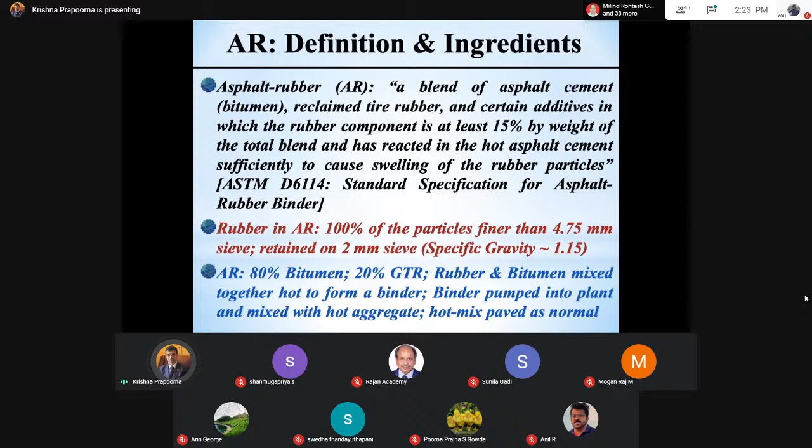Now, if you talk about open graded asphalt rubber - so gap graded is 6 to 8%, open graded, which is much more porous in nature, the binder content will vary anywhere between 8.5 and 10%. You see, much richer - it has more space to accommodate more amount of rubber. So go ahead, use it. We have been very successful in blending both in India, also in our own laboratory facilities, and we have also tested on actual field sections, which I'm going to share with you. So this is the prologue of what we will discuss today, and you can see the AR technology has been very well used.

One very good strategy as a pavement system - it's a systemic strategy, and this has been acknowledged by several experts across the world. You have a very strong base course with PCC, Portland Cement Concrete, and then a very thin asphalt rubber friction course, ARFC. That's a blend, a combination, a composite structure that has been successful across the world.

One problem here is slightly political - you have this Portland Cement Concrete at the bottom. Now the cement industry comes and says, okay, we placed all the structural layers all over the place, we put concrete, and you're putting one small thin layer of asphalt. Now I cannot see this, obviously, right? So the concrete industry says, we are not able to see the concrete that we placed. But you should go beyond that - the systemic approach is, this is only half to 1 inch, which means only 25 millimeters, could even be less than that. 12.5 to 25 millimeter section on top of the PCC, which could be even 600, 500 millimeters thick. So it's a strong structural layer at the bottom and a thin functional layer on top.

What is the advantage of this? You see, after 3, 4, or 5 years, let's say it has started to ravel, which is unlikely. With asphalt rubber sections, I have seen with my own eyes a few sections that are about 25 years old without even a single fine crack.

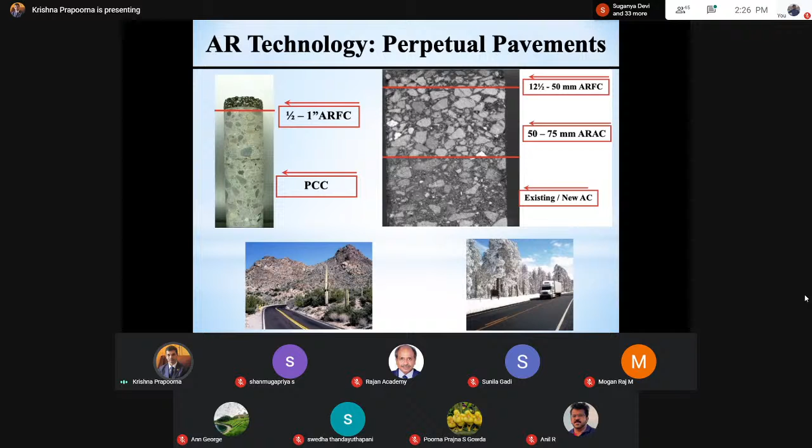There are a few sections in cold countries where I have seen - because I worked in Europe, we placed asphalt rubber there also - and we saw some cracks. There's no doubt there are cracks during the winter season, especially low temperature thermal cracking, but then it started to self-heal. That self-healing capacity comes from the rubber's resilient property, because rubber is resilient in nature. It's elastic, right? It can come back to its original shape.

So the benefits - humongous amount of benefits, multitude benefits here. Reflection cracking, or reflective cracking as we call it: we have concrete at the bottom, there are cracks near the joints, obviously joints are vulnerable to cracks, you have an asphalt overlay, it simply goes up. Now if you put asphalt rubber as a stress absorbing membrane interlayer, it can arrest cracks. Less maintenance, more durable, obviously.

Raveling - no raveling whatsoever, because it is so rich in binder that there is no dry aggregate whatsoever. It's rich, 7 to 9% binder content.

Good rut resistance. Question, right? Some of you might think, it has high amount of binder, it can start to bleed. But we are placing this as a very thin section, maybe 25 to 50 millimeters. You can expect very little rutting on these sections, mainly because you have larger sized aggregates which can take up the load and help arrest rutting also.

No problem with cracking, as I told you, self-healing. Skid resistance, because it is open texture or gap texture. Definitely smooth ride, very good ride comfort. And I showed you a picture both in cold climates and hot - in fact, I was there in Arizona and Sweden.

In one year, 2010, I experienced 70 Celsius pavement temperature in Arizona, and I moved to Sweden the same year where I saw minus 46 Celsius. So you can see a range of temperatures, and we have seen asphalt rubber working very fine in both conditions. In fact, less splash and spray because of high porosity.

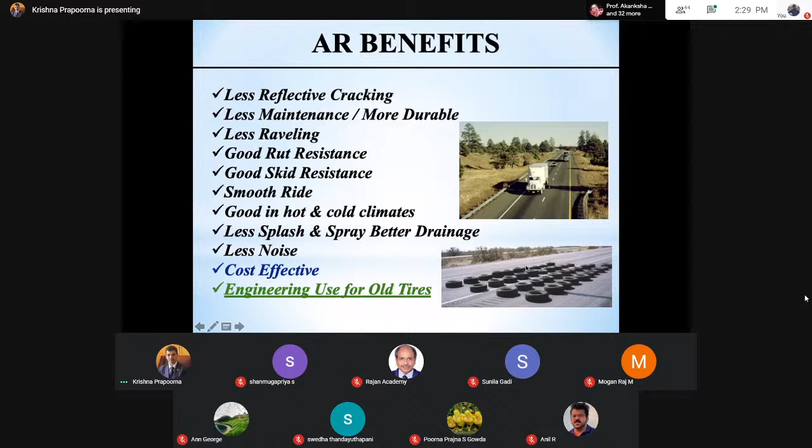If you have a lot of tires that are discarded, don't burn them. Use them in asphalt rubber blending.

If you need to know more about asphalt rubber, how it is blended, how much rubber content, what is the gradation, what is the process, wet versus dry, all of this, you can go to the asphalt rubber standard practice guide. This is free to download at rubberpavements.org. I'm one of the co-authors. In 2012 we released this document, the asphalt rubber standard practice guide. You should be able to get this. If you cannot get it, let me know and I will share it with you.

Now, one project that we did, I'll get into the actual point. We had a Government of India Department of Science and Technology project when I was at IIT Kharagpur for about 3 years, where we developed a mix design procedure and implementation plan for asphalt rubber gap.

Now you see, I'm talking about asphalt rubber only, not CRMB. CRMB is a different blend, with 8 to 12% rubber content. It does not fit into the ASTM definition. So whatever I talk about from now on is asphalt rubber, meaning a minimum of 15% crumb rubber inclusion by weight of the total blend. That's what it's all about.

So asphalt rubber gap we wanted to develop. What is gap here? It's a gap-graded gradation where there are a lot of fines and some portions in the middle are removed from the aggregates. They are all larger sized, obviously.

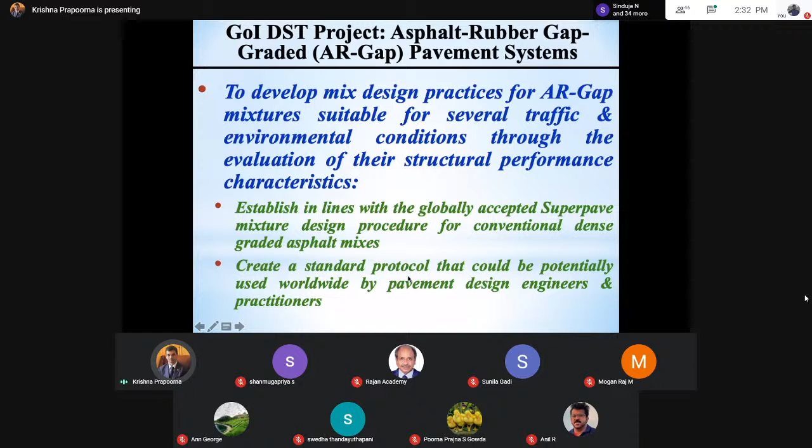So we fully went into the Superpave design, and that gave us a lot of confidence saying, okay, this product will last for this many number of years. We checked this with our lab facilities and lab experiments, and we went to the field and implemented it also. We also wanted to create a standard protocol, which is now pending with the DST.

Now, if you need more about what asphalt rubber blend is, if you don't want to go through the design guide, there are two different papers. One talks about state of the art research, a research review, by one of my past PhD students who worked at IIT Kharagpur, now a professor at IIT Palakkad, Dr. Veena Venudharan. Yesterday I showed you about pervious concrete, that was another student who works at IIT Bhubaneswar, and this person actually works at IIT Palakkad.

And then the other state of the art paper we recently published, in 2020, in the Resources Conservation Recycling Journal, with my other colleagues from the US and Europe. Both are very popular journals. We talk about what is the advancement, where do we use this blend, can we use this blend in dense grading? That question is always there, right?

So we've always been saying, okay, gap, open, asphalt rubber - what about dense graded asphalt rubber? Can we use it somewhere? Yeah, that is what we are doing right now. Our team is now working on coming up with strategies where we can simply blend rubber modification into dense graded mixes, probably with a dry process where we don't have to worry about agitation, with storage issues eliminated and oxidation issues eliminated.

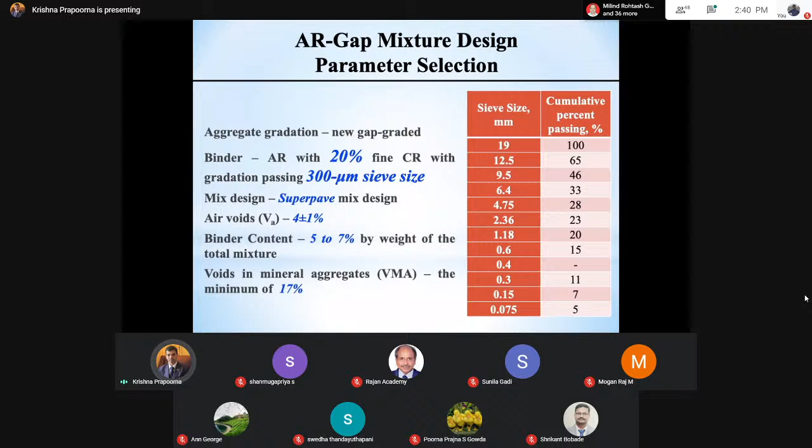Now, a demonstration test section I thought I'd share with you. We came up with this design - this is an actual test section, a cross section of a road on a state highway, now a national highway - a very high traffic road near Calcutta.

We talked to West Bengal Highway Development Corporation, and they were benevolent. They gave us this section where we used a very thin layer - only 40 millimeter asphalt rubber gap, our product, overlaid on DBM, WMM, GSB with different gradations. We did not change any of these; we only did the topmost layer, the AR gap, on top of several existing layers. We applied a tack coat.

So here you can see the demonstration test sections. We had about 250 meters across two sections. One was 5.3% binder content, the other was 6.3%, and the 6.3% lasted for 2.5 years. We told them clearly that 5.3% we'd try for their sake, since that's closely related to the control mixture - you all know 5.3% is what we use for a dense graded control mixture. So we put a control section, a 5.3% asphalt rubber gap section, and a 6.3% section - three sections in total, and you can see all our engineers there.

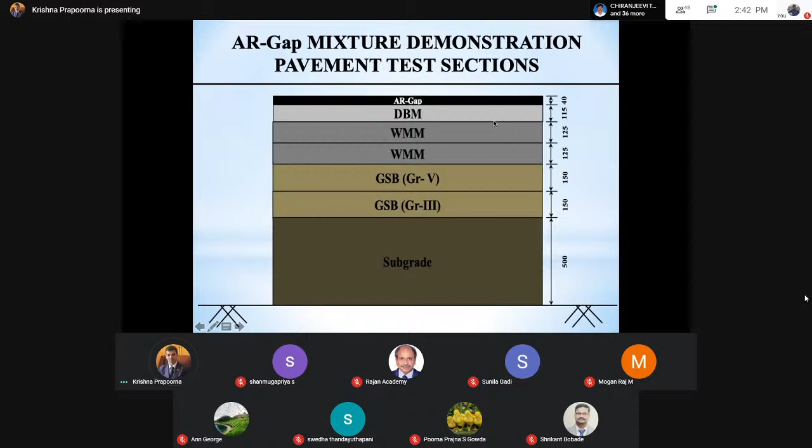One important construction practice for any thin section, as a general thumb rule - if you're from the construction industry advising colleagues, when you have a thin section like 40, 50, or even 30 millimeters, don't use a vibratory roller. Use only a static steel wheel, and if required, a pneumatic tire. Run the required number of passes and finish the compaction. Don't use vibratory roller, because if you do, the aggregates start to get crushed and break into pieces. The voids you designed into the gap graded or open graded mix get filled with these small particles, defeating the purpose of the thin section design.

So we told the engineers - the engineering chief and contractors were all there, and we were monitoring quality control ourselves. We said please don't use the vibratory roller. They were actually furious with me, but I said no, you cannot use it because it's a very thin section - they'd been used to using vibratory roller and pneumatic tire together. I said use only static steel, without vibration. You can see the smoothness achieved at the end. In June 2017, we had one paver doing the job, and we calculated the required number of passes.

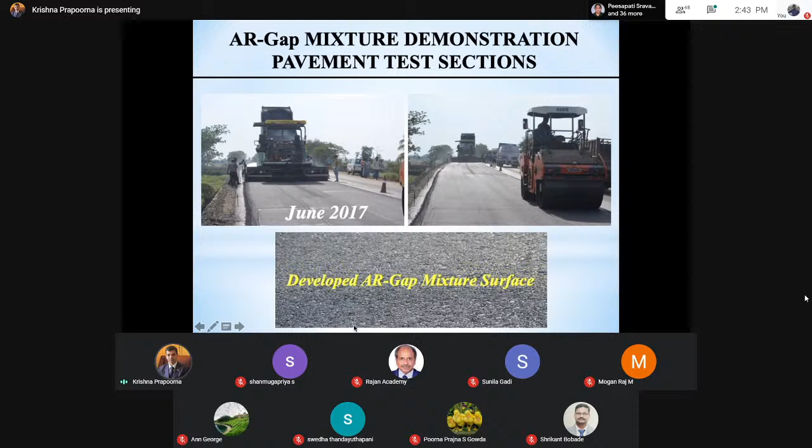Finally, this was the product, the asphalt rubber gap mixture surface, from a very close-up view. June 2017, very smooth, very well done job by the contractor. And this is the trial section. You can see the asphalt, this banner still holds, it's still there. Asphalt rubber gap graded wearing course, 40 millimeter. That was the design that we made.

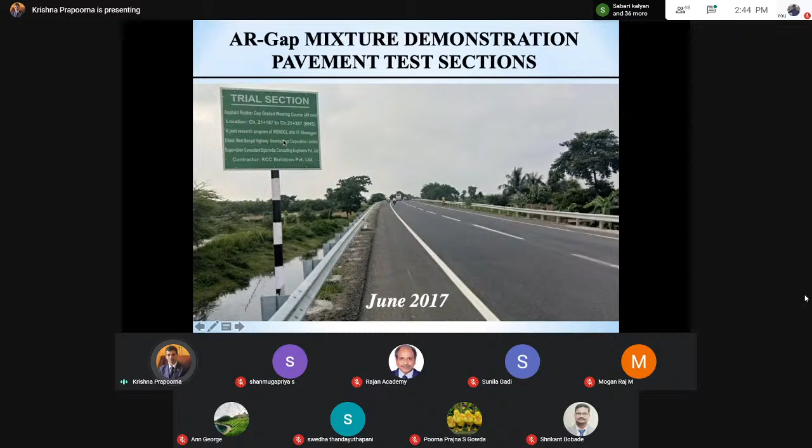This was a joint program with West Bengal Highway Development and IIT Kharagpur. Here is our team. Some of my students are also there. Some of my MTech students and the general crew that was helping us.

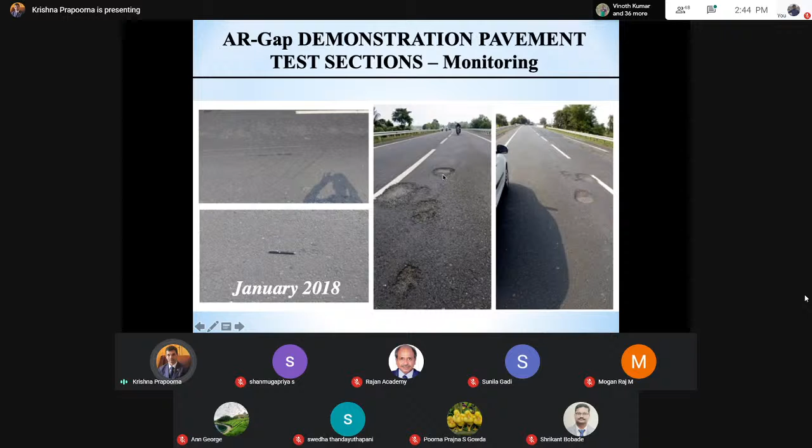We monitored that for about 3 years now. In January 2018, when I had moved to IIT Tirupati already, we took some pictures. I went back there and took some pictures. This section is where we built. This is the control, all potholes, same road, no pothole here. And then the same year, you can see the control sections had fatigue cracks.

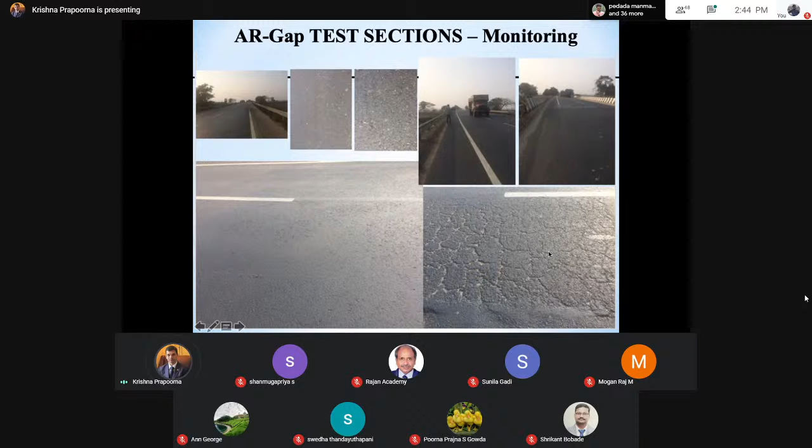Nothing on our sections. In November 2019, very recent, about 1 year ago, these pictures were sent by the West Bengal PWD people. They said yes, your sections actually slightly had fine cracks, so we had to patch it. The reason was simple: the state highway that we designed became a national highway. We didn't design for a national highway traffic.

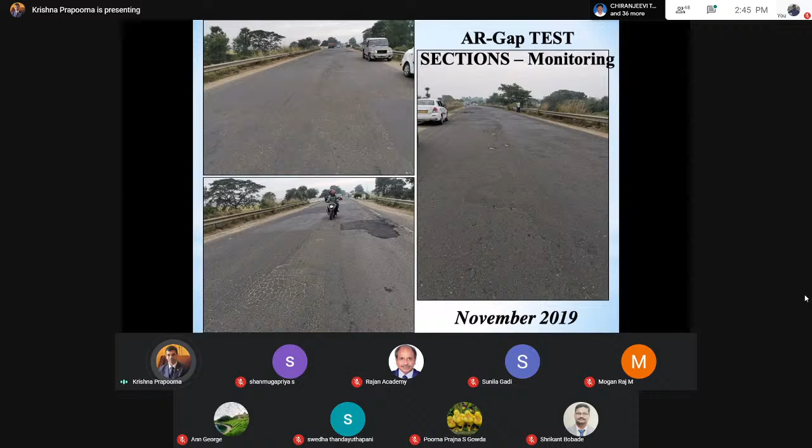So we are now capable of designing it for a national highway. And it will last, I'm telling you, it lasted for 2.5 years without even a single crack. So if you tell us you'll design it for a national highway, we will give you a product that can last for at least 8 years minimum. That's the confidence there. That's about asphalt rubber.

We'll take up some questions if you have.

Now let me go into pavement asset management. The project that we have with Andhra Pradesh Road Development Corporation. We are actually developing a toolkit for them based on artificial intelligence, artificial neural network, and so forth. I'll share with you some 5 or 6 modules that we have already developed, and then how do we go forward with this.

Pavement preservation: you can arrest cracks, you can have raveling removed, all of those things that you can do with asphalt rubber. That's a very good pavement preservation strategy that we have tried. You have cracks, raveling, potholes, all of those that can be arrested with simple minor rehabilitation. If you have major rehabilitation, that means you are going to rip off the entire section, mill it, mill and fill - that's what we do.

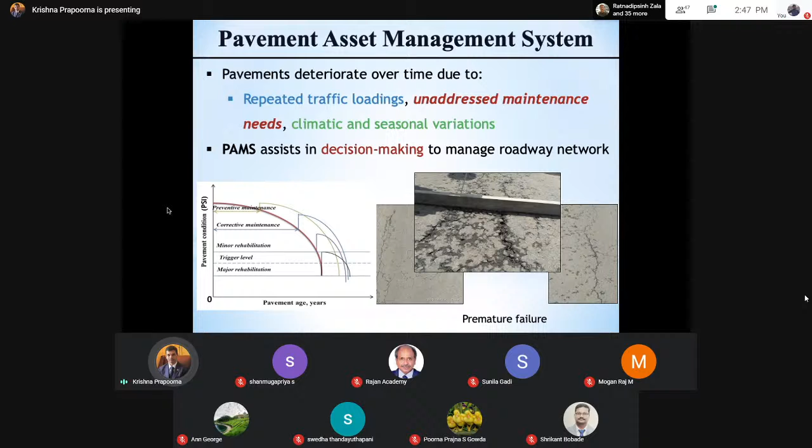If that is there, then you incur a large amount of cost. So that is exactly where this pavement asset management toolkit will help us - what happens at the end of the first year, second year, 10th year, 15th year, and so forth, for both asphalt and rigid sections, concrete. This assists in decision making depending on the budgetary constraints that we have within the road.

So if you look at the history, it all started in the 1950s during the AASHO road test, done between 1958 and 1960 in Ottawa, Illinois, USA, where they had several test sections built, about 800 sections built. They ran the trucks, different trucks, and that's how the ESAL concept - equivalent standard axle load, single axle load or standard axle load - came up. And they came up with different designs of CBR and many other things.

So within the same project, they also came up with this asset management, and they came up with something called the Present Serviceability Index and rating, also the condition rating, ride comfort. All of those were the products or outcomes of the AASHO road test, that is being used universally now. In 1965, that's what is the PSI, Present Serviceability Index. In 1970, they came up with a management system, long-term pavement performance studies - in the US and elsewhere we call it LTPP. It's still running right now in the US.

Washington State DOT came up with the project level, apart from the network level. Good roads, obviously, they came up with the statement: good roads cost less, which means you need to be maintaining it every now and then, so you can reap the benefits of the entire design life. In 1979, they had an NCHRP report on pavement asset management, and that became an international level workshop on pavement management systems, PMS. Then they came up with guidelines in the 1990s, which also got into the AASHTO 1993 guide, in both asphalt and concrete.

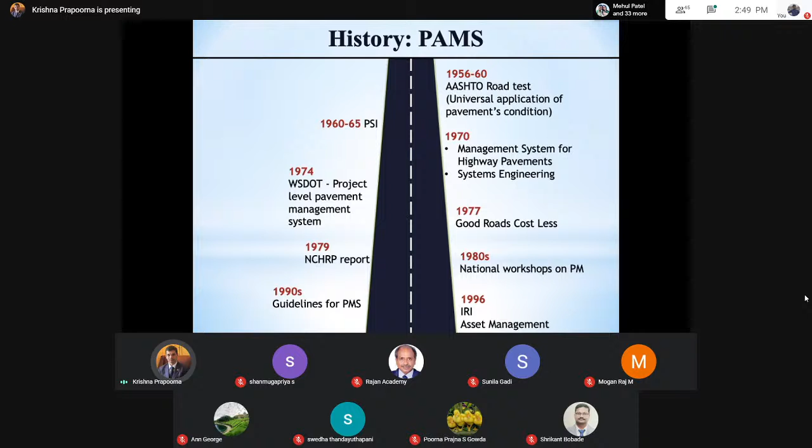Now there are several modules within PAMS, Pavement Asset Management System. Obviously you need to be collecting data. That's the first step, it's a circular process. You continuously collect data on cracking, pavement condition, potholes, etc., and you create a database, we call it the database management system, DBMS.

Then you detect the various distresses using either manual survey or windshield survey, or using computer tools, with a mobile app also possible nowadays. The DBMS and data, they talk to each other using some kind of network, that's the communication. Then we predict the performance of the pavement sections based on some numerical analyses and toolkits, based on the actual data.

Then you come up with the alternative design strategies. That's the recommendation that I showed you: preventive maintenance, routine maintenance, minor rehabilitation, and many other things.

One other advantage of PMS is, because you have the data, you should be able to calculate the costs also. When it starts to deteriorate, cost will start to increase. If you don't do anything for 12 years, finally when the pavement fails, you will have to invest a lot. That's the cost comparison of alternatives. Then you do the prioritization based on the budgetary constraints that we have, and finally implement the strategy that we have come up with.

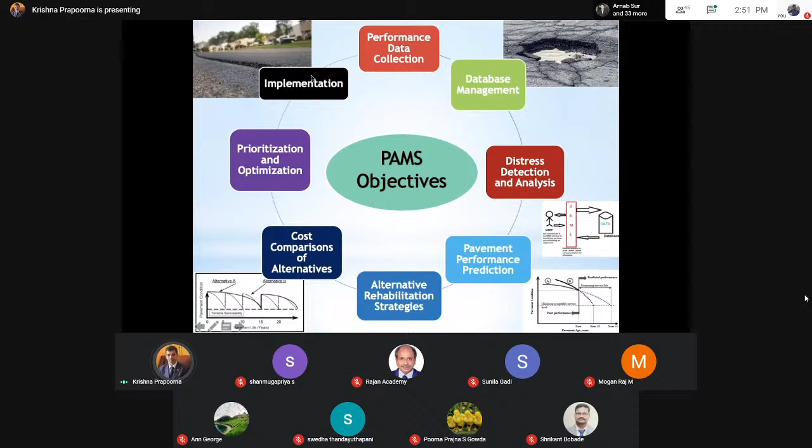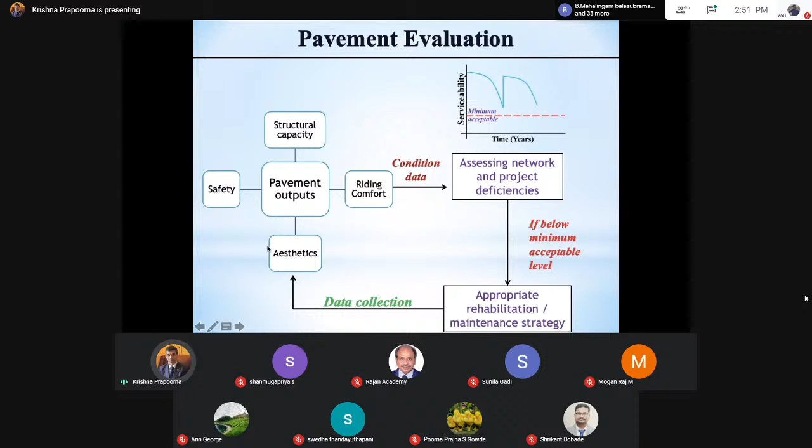So now we are actually working on all of these at IIT Tirupati, and I'm going to share with you 5 or 6 modules. What we are doing right now is, we have data that we have collected from AP Road Development Corporation, and then we are coming up with strategies.

Now, I told you there are two different methods, one is automated, the other is manual. You have a profilometer, you can measure that. There is a network survey vehicle available in India as well, which has different cameras embedded within the van, on top of the van, and lasers in the bottom that can measure the profile, lateral and longitudinal.

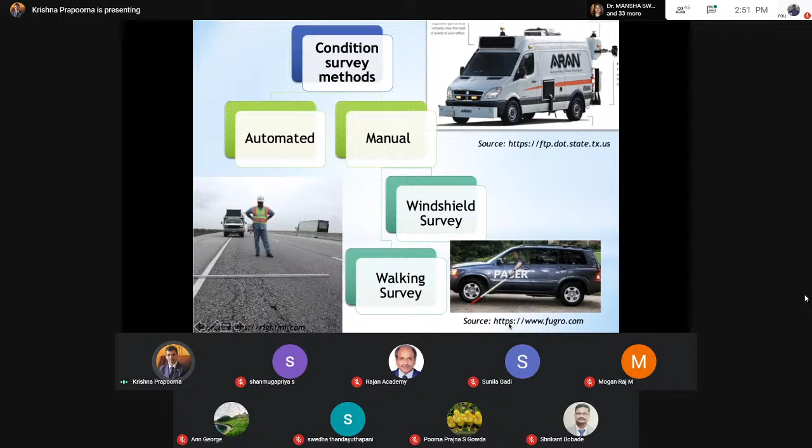And you can also do a walking survey, we call that manual, that's what this person is doing. Windshield survey using a car, we have done that also many, many times.

Now, one thing that we have got data, you can see IIT Tirupati director and me with our common student, Pavani, she's finishing up her PhD with the toolkit very soon. If you call me again, as I told you, 2 or 3 more months, you will have more insights about what we are doing. So you can see our large group here.

We have this network survey vehicle from AP and Telangana state, both of them have this. In fact, this has run across the country also, IRSM is managing this. So they have 3 cameras mounted on top of the vehicle, and there is a laser sensor there, you can see that in the front, capturing the lateral profile.

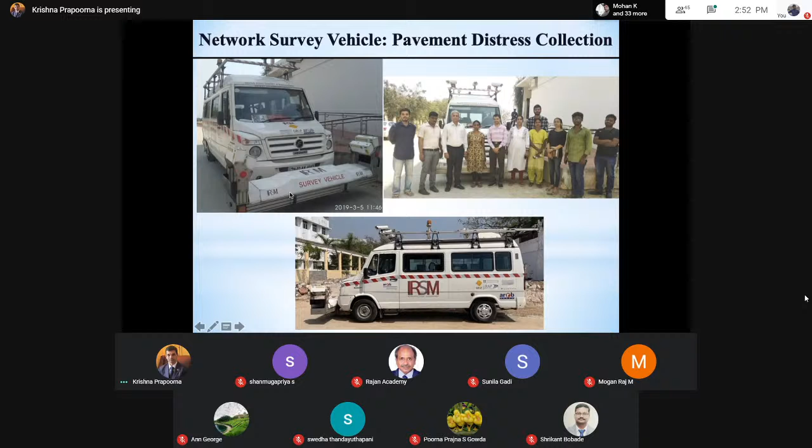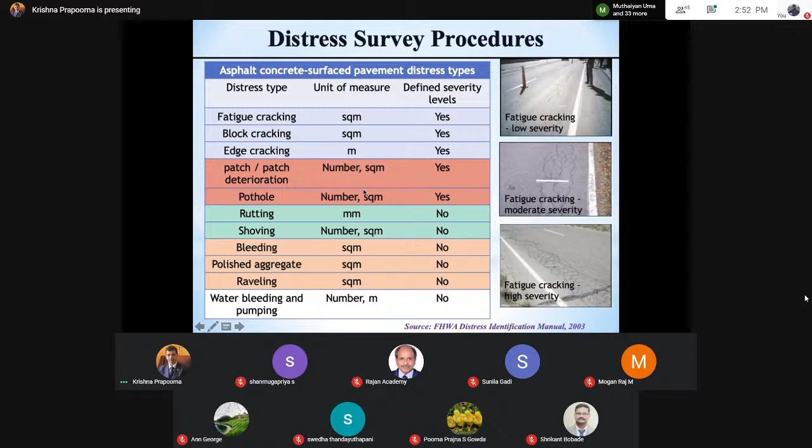Now, what else have they given us? They have given all kinds of distresses that they have measured: fatigue cracking, different severity levels, different extents. And what they have done is, they have actually captured all of these distresses, but then they have put it into sheets.

They don't know what to do with it, so they gave us this data. We said we will come up with the distress prediction models and give it to them, so that they can come up with strategies based on the budgetary constraint. If they have 1 crore for this year, which of the sections out of whatever number we have in the entire state, how many sections have to be done immediately, how many have to be rehabilitated, how many have to be used for preventive maintenance, and so on. So this is a major drawback.

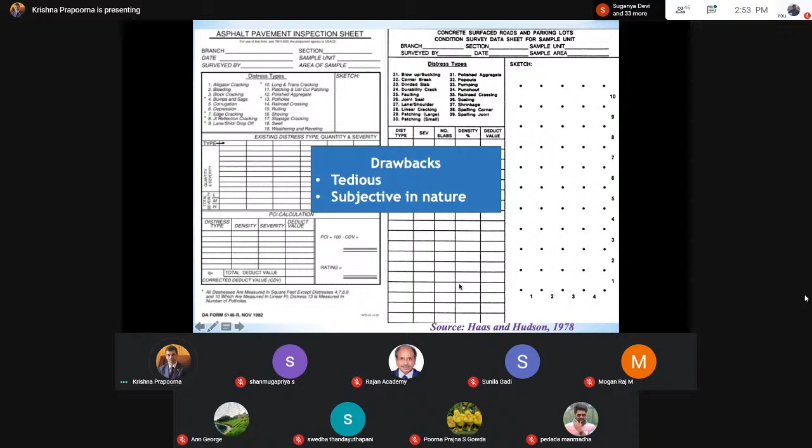It's a very tedious job just to have this in sheets. So instead, if you put it into a DBMS and come up with strategies based on advanced techniques such as AI, machine learning, and deep learning, you should be able to hold this data forever, or at least for a long period of time.

If you want to know what is PMS, and don't want to read a textbook, go to a paper. You can see Pavani, our current PhD student—we published a paper recently in Automation in Construction Journal. You can get it there. It's a long paper, but gives a very comprehensive literature review, about 180 to 190 papers that we collected. So you can get new ideas and new prospects out of that.

There are 5 toolkits that we have developed. In another 10 minutes I should finish this, bear with me please. First thing: pothole detection. We are now able to detect potholes, quantify how much material is required to patch that pothole, and also maintain it.

The second thing we developed is probably the first of its kind. It's a published document now. We have come up with a distress detection strategy with almost 18 distresses—imagine 18 distresses. It's a multi-distress detection system, we call it. It's a comprehensive study that we have done using almost 6 lakh images coming from the state.

We have come up with an engineering criteria based pavement condition index. We went one step ahead and came up with a deep learning based road roughness prediction model, which is also published, and then a biparametric homogeneous model as well. All 5 of these are now published. If you want me to share with you, let me know later. So we are able to predict the distresses and also come up with some strategies.

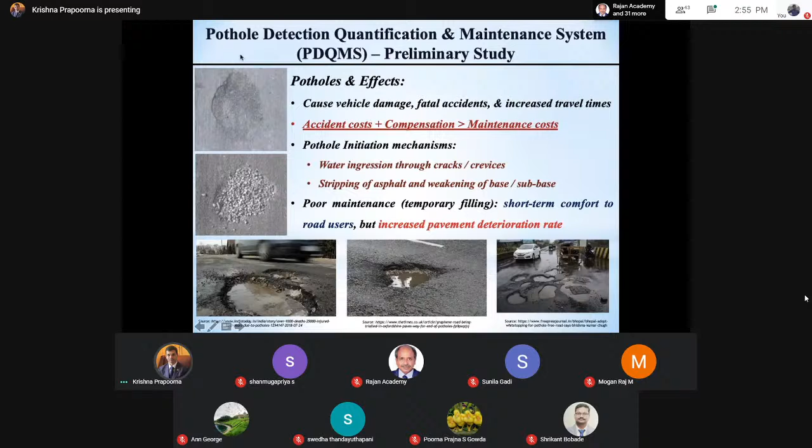We were very successful using an ANN, artificial neural network. I'll not go into details because it's already published—please go to this if you can, you should be able to read and understand what we have done.

We had a lot of images, approximately 6 lakh images. We found there were a few images—this is all coming from the AP state. I'm sure Tamil Nadu and many other states also have these kinds of datasets. We are now working with Kerala state; we have come up with an agreement that we will work with them and give them this kind of toolkit. If you know someone in your state, let me know, we will help them out. We are doing it for the entire country, so we can help them.

So we actually had the image dataset. We pre-processed it to suit our architecture. We used YOLO, you only look once—that's the YOLO architecture we call it. It's version 3, slightly old, but still a very robust architecture, wherein we were able to segment the potholes from the images. You have a large image, you need to detect the pothole first—that's the first step, right? That's called the pre-processing we did.

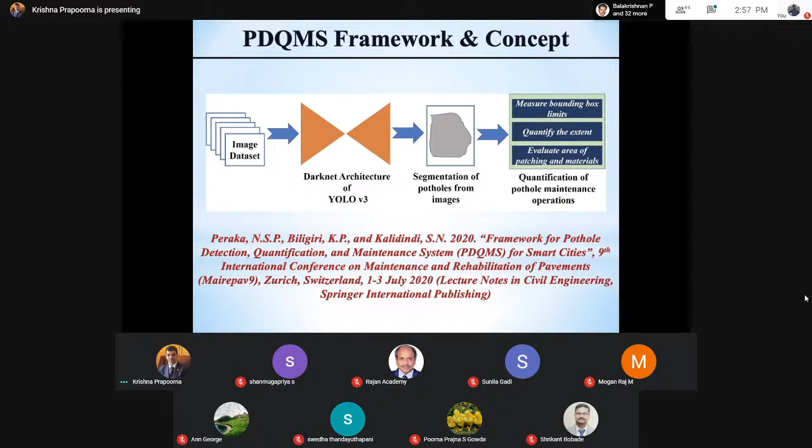And then we created a bounding box around the pothole and calculated the extent of the pothole. Finally, we measured the depth of the pothole and determined how much material is required to patch that pothole.

You can see here there are various steps. We have the original image, we pre-processed this, and you see this is the original image with high resolution. Then we had a tensor quantity—I'm not going to explain this, you people have to read it, lack of time obviously. And we came up with different classes of pothole: low, medium, and high severity, and also extent. So we had 9 different pothole types.

We came up with 3, so that it's easy for the network architecture to read 3 instead of 9, because it becomes really cumbersome to read otherwise. Then we came up with the data dimensionality with 7 -- that's 7 A multiplied by B multiplied, the 7 angles that we can actually measure. That's a tensor there, so you can see we can measure the bounding box.

So for example, this is the actual image. You put it into the YOLO architecture and computerize that. You give the architecture the different programming -- you need to program it in such a way that it has different layers embedded within the ANN, artificial neural network, and then it will detect the bounding box and also label the pothole image.

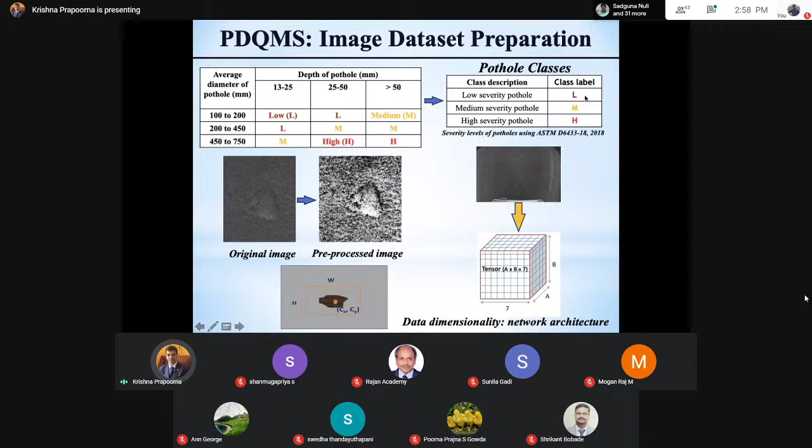So this is the large image that we have, and it detected the pothole that's here. It also labeled it L, which is low severity pothole. If it were medium, it would call it M. If it was high, it would be H -- depending on what kind of pothole type it is.

Finally, we segmented the portion and came up with the amount of material required for patching. That factor is in the paper -- it's anywhere between 15 and 25%, depending on the thickness of the pothole. So it's a 3-dimensional view. Now you see a 2D image became a 3-dimensional product for us. You should be able to get the pothole class coming from our network, and then the factor that's already there tells you how much material is needed.

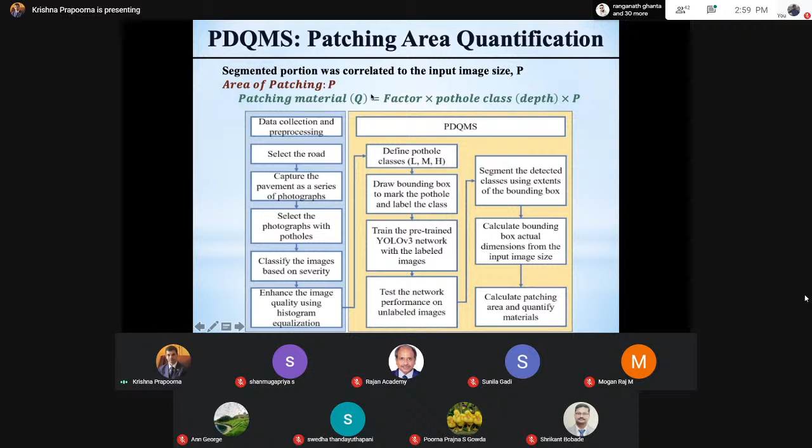Here is the chronology of events that we followed, as I just mentioned. Then we validated that, and we found the number: 89.23%. It's really large. Our numbers are really confident because we had a very small decay, and also the learning rate was 0.001, that's 1 into 10 power minus 3.

On 41 images, we just tried with 41 images and we published this. Now we have actually come up with more than 1,000 images. We have also published that, and we will share that with you maybe in the next couple of months.

Now we wanted to check if there is any other algorithm, mean average precision -- that's the mean average precision you see with one of the other papers that's already there in literature. It's slightly higher than theirs, ours is slightly higher than what they had, 88%, but still substantially better than theirs because of the architecture that's robust.

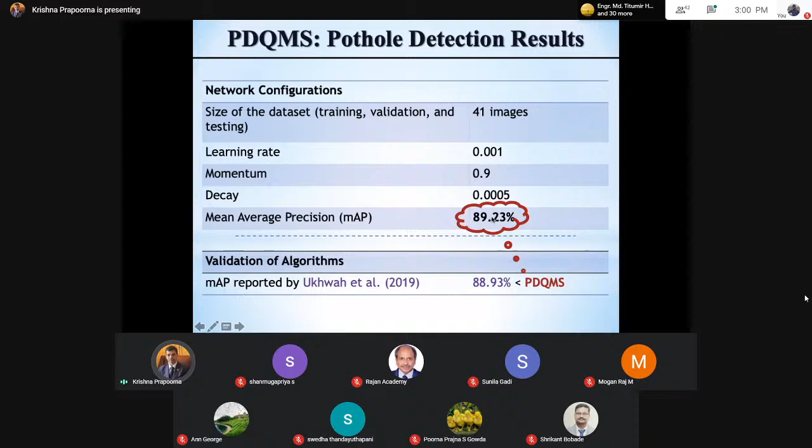The second thing I thought I'll share with you, which is also a published document, going to be presented in Transportation Research Board in January, next month, in fact. We have a multi-distress detection system that can detect about 18 distresses very easily. Again, we trained this using YOLO version 4, so we slightly advanced ourselves.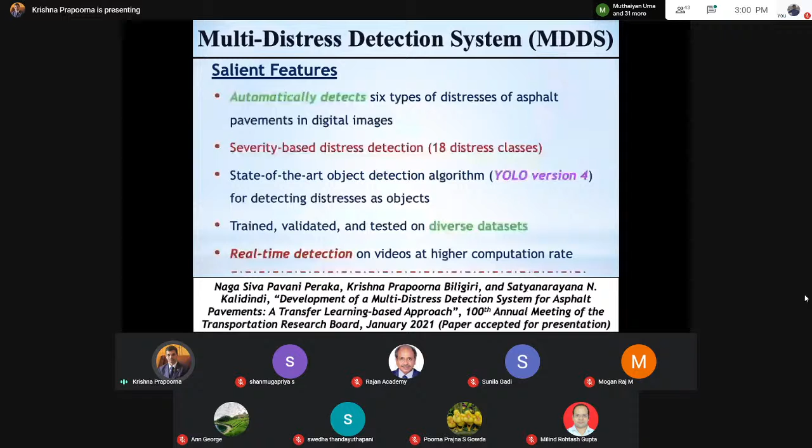We trained and validated on diverse data sets -- when I say diverse, there were 3 different data sets. One, the LTPP coming from the US, long-term pavement performance. The other is the German data set. The third one is our AP state. All 3 data sets were combined to get approximately 1500 to 1600 images.

Now you see, this is exactly what AP state gave us. We had the real time data, you can see that -- 3 different cameras. I showed you a network survey vehicle that had 3 cameras mounted on top, capturing these, plus a side camera and the bottom camera that captured the roadway profile when it was moving.

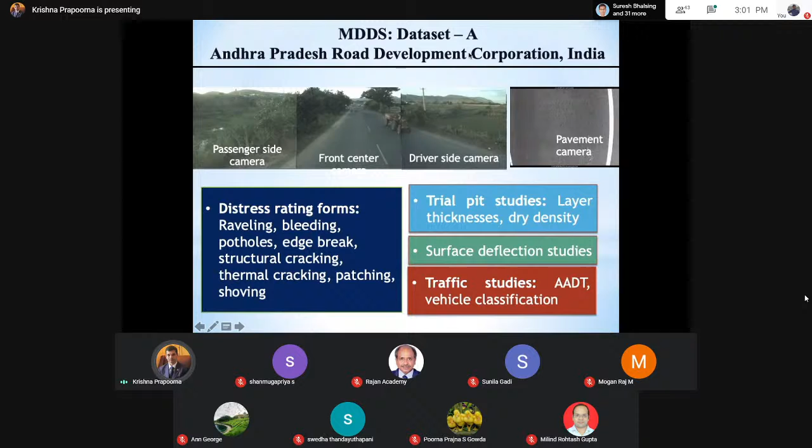So all 3 data sets were used by us. We captured the images -- I told you we had more than 6 lakh images. We boiled it down to about 1500 images where we had different types of distresses. And these are the things that they gave us. Apart from just this, all of the other things they gave us, we are working on it.

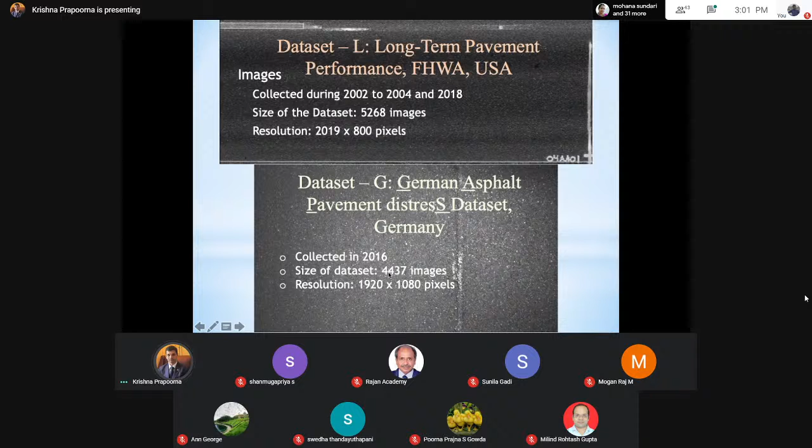So 3 data sets I mentioned to you: long-term pavement performance from the US, German data set -- you can see the number of images that we had, 5,000 plus, 4,000 plus, and then the Andhra data set, that we call A data set. We had 800 images that had different distresses.

So what we did, we again pre-processed it because we had images and videos. We had to convert it to grayscale, otherwise it's difficult to read by the architecture. Color images are very difficult to read, and it also consumes a lot of data, a lot of memory space. So we converted all of those to grayscale.

We did that pre-processing, and then we enhanced the image with equalization and filtering. We used Gaussian filtering techniques that gave us better confidence. Yeah, this is what we should be doing, and this is what we found.

So the original image you see here, and this is the pre-processed image. Original, pre-processed, so you can see different distresses. There is pothole, patching, cracking, and many other distresses. You can see cracks here, right? You can see edge cracking and many others.

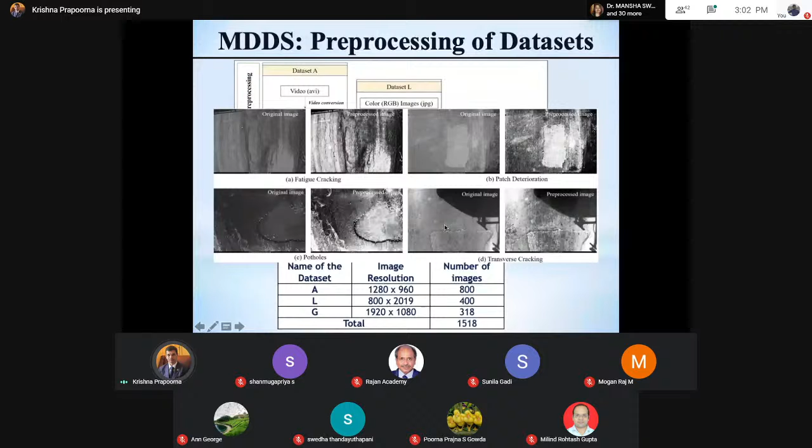So we had in total 1500 images coming from 3 different data sets, and our architecture was able to detect the distress and label it using a LabelIMG tool that we used to train the data set. So it was integrated with image processing. We are using image processing and the artificial neural network, a combination of both, right?

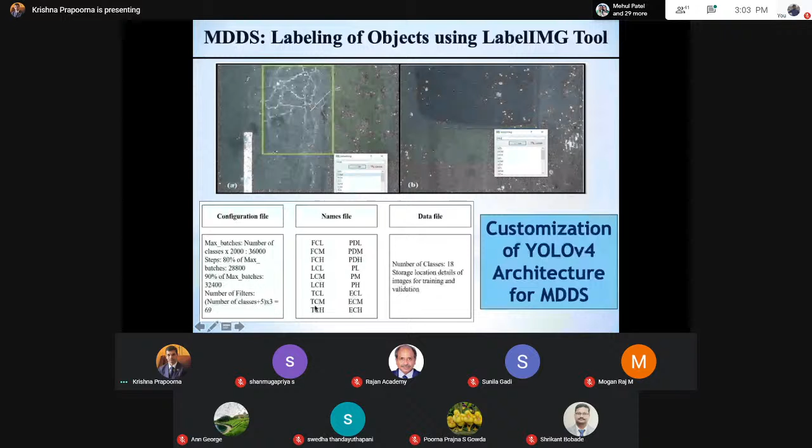And we were able to detect 18 distresses, 18 distress classes that I mentioned here. You can see here 18 classes that we mentioned. And here are the results. You see here 87.44%. That's the highest in the world right now. Okay, the first of its kind in the world, in fact.

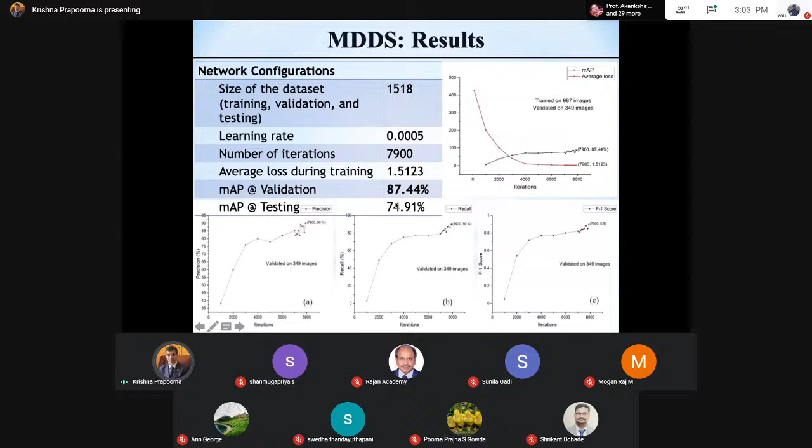So it's globally validated now. We had 80% for the training and 20% for the validation, which really worked out very well for us. You can see here 87 and 75%. That's really large, and we were able to capture all kinds of distress.

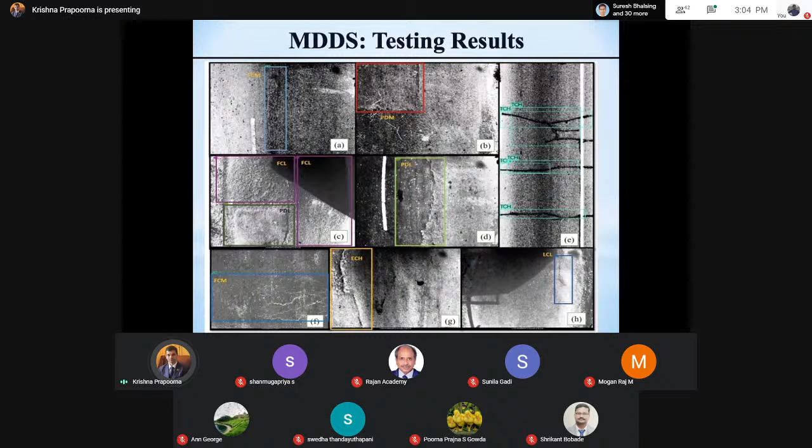Let's see, EC, that's edge cracking, high severity, longitudinal cracking, low severity, and potholes, raveling. I'm just showing some pictures here, but it was really able to capture to the tune of 93 to 97% accuracy. That was the accuracy that we had.

Then the other thing we have done in the past with one of my students at IIT Kharagpur, we are able to capture the distresses based on the pavement condition. So we are able to capture the pavement condition. If you give us the data, we should be able to capture it, and we are working on this. One protocol that's there, ASTM, is really not suitable for India.

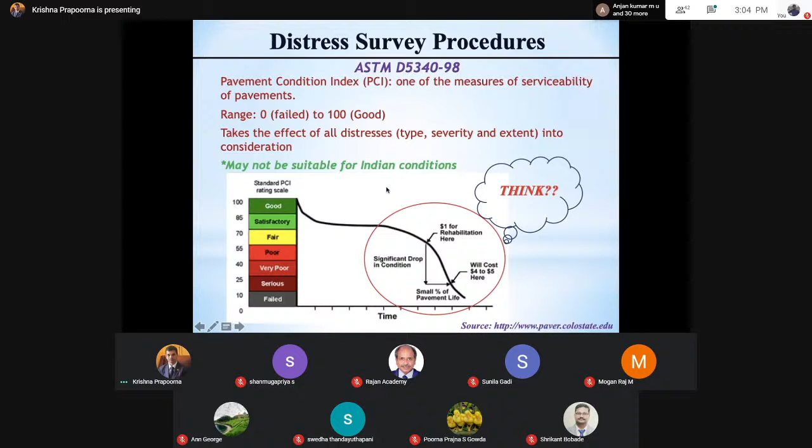So we have actually published this document. If you want to go there and see, it's about prioritization. So you can see one of my students there, Ankit. He got his MTech from IIT Kharagpur, and he worked on this.

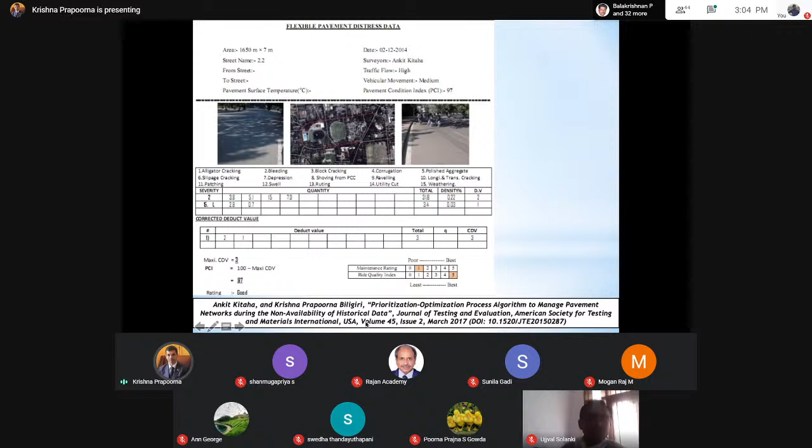This is the first of its kind in India, where we came up with the condition rating, okay, with engineering based criteria. So we developed our own data sheets for about 100 plus kilometers across Kharagpur and in Bengal state, right? So that's what we used to come up with these strategies for all kinds of maintenance.

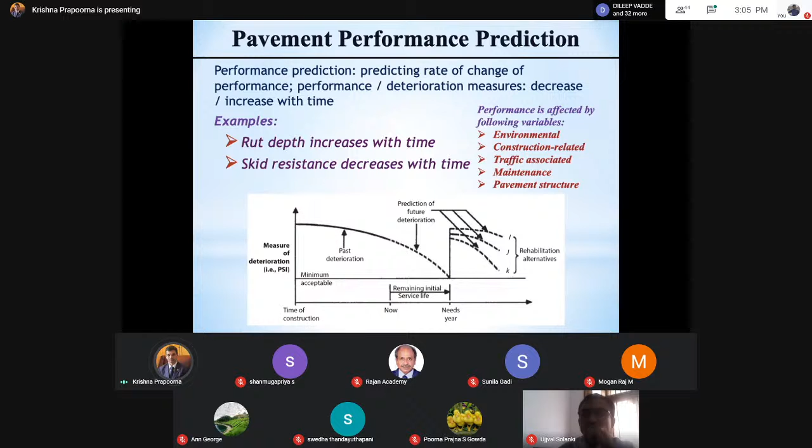The second, the third, the fourth module, right, this is about homogeneous sectioning. So you see, we actually came up with the road roughness prediction model.

Again, we used a deep learning network, and we were able to capture all of these. We input that, there are different layers, and we calculate the International Roughness Index. That's what we were aiming at, because the LTPP database captures IRI. They have measured IRI, but what happens after a few years, we are not able to do that. So our network can do this.

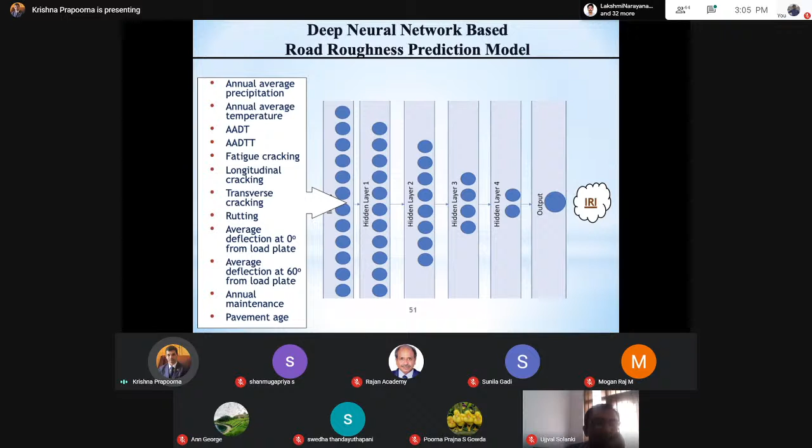This was recently presented by my student Neelansh, BTech. It's actually a BTech project that he did. Pavani is our PhD scholar. So it was just recently, just last week, we presented this.

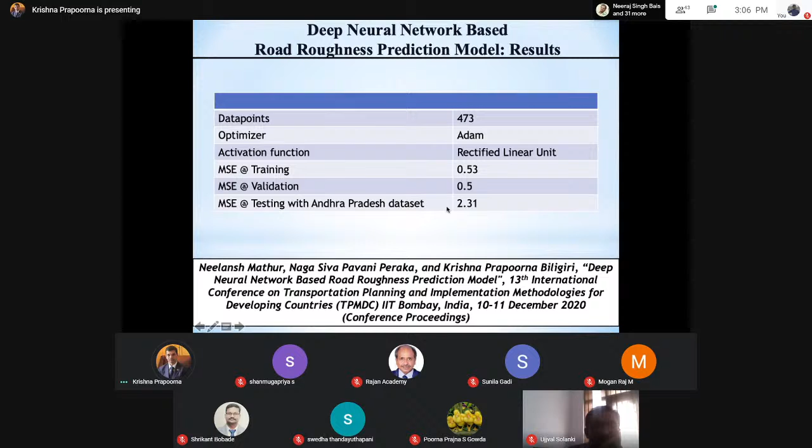And you can see here the mean square error is really, really low for about 473 data points coming from across 50 states in the US. And also the AP data set that was used for testing purposes, we tested that, and you see the mean square error is really, really low for that matter.

Okay, the next thing, the last thing that I wanted to share with you is the homogeneous sectioning. Let's say you have 100 kilometers and you want to segment that into 100 sections, with each section having different distress, right? And you want to also segment this into various forms, such as 4 sections having similar distress, 5 sections having similar distress. That is called homogeneous sectioning. Okay, you are sectioning these roadways based on homogeneous distress pattern.

So we came up with something called the SPURN value, S-P-U-R-N, that combines 2 distresses. Currently, if you go to the literature, it's only uniparameter, which means only one single parameter can be detected. So we came up with one advanced version with different approaches: cumulative difference, absolute, and control charts.

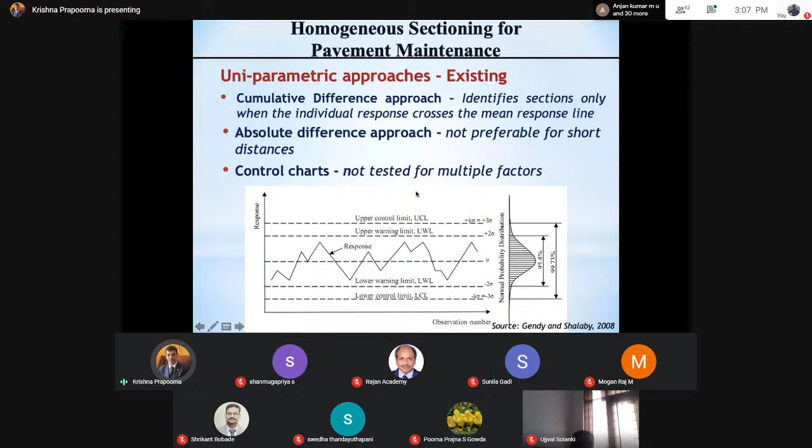We came up with the SPURN value, which gave us the APRDC data. For one section I'm showing you like this, but we did it for the entire roadway stretch in Andhra. We were able to segment this based on 2 different distresses: rutting and roughness.

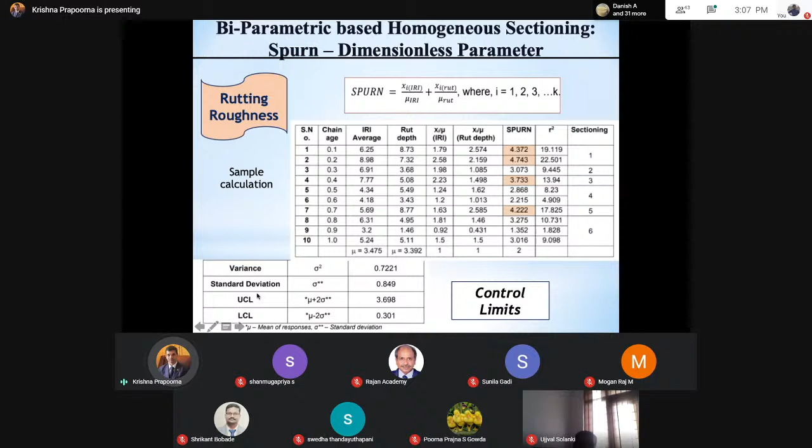So this is the definition. You come up with the IRI and RUT, and the homogeneous sectioning based on these 2 distresses. You have a threshold value, and then you calculate that. Finally, you arrive at the upper control and lower control limits based on the charts, and segment those sections based on different color patterns and come up with treatment strategies.

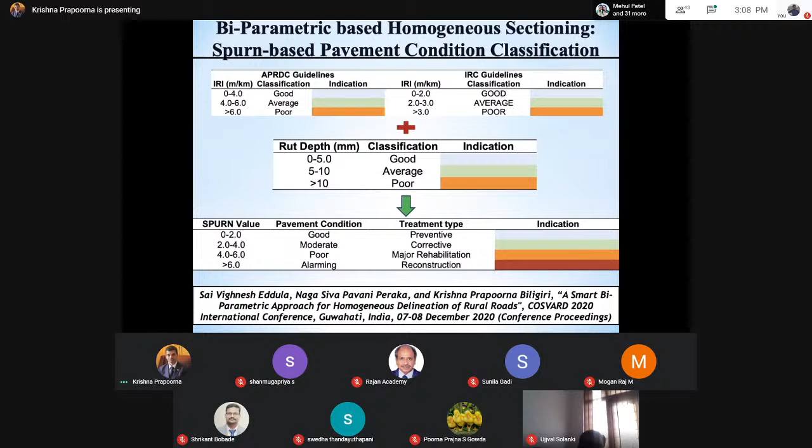You see, if the value of SPURN is between this range, you have a different treatment type. Or if it's greater than that, it's an alarming condition, so you have to go for reconstruction. We were able to detect this using ANN. It was also presented just last week at the Smart Villages International Conference, and it's now going to be published in some other journal very soon. So that's the 5th module that we developed.

So here you can see all kinds of different colors. These are the segmented things that we did based on IRI and rutting. Like this, we did it for every single thing.

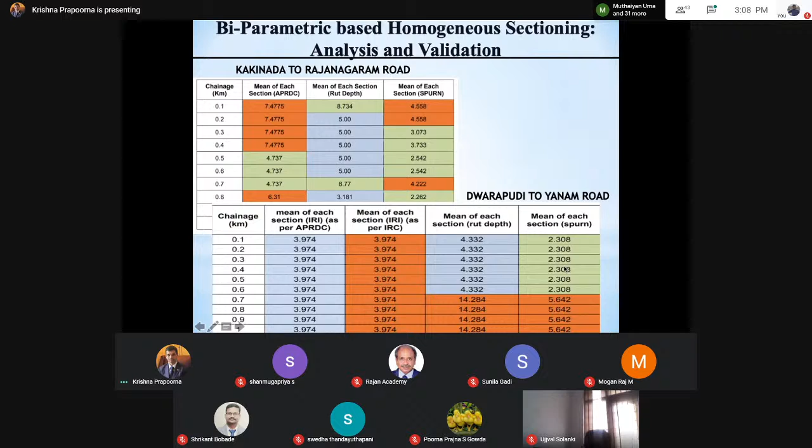Now, where are we going? Again, come up with different research problems, please work on these. If you really require our help, let us know. We'll be glad to help you out.

We are now monitoring various road classes. We have an NHAI tie-up, so we have more than 200 kilometers of stretch where we will be placing some asphalt rubber sections. In fact, we designed the entire IIT Tirupati campus. So we will be placing an asphalt rubber gap section very soon, maybe in the next couple of months, or maybe in the next 1 year, I should say.

So we'll be monitoring the long-term performance, and we need to be automating. As I've told you always, the database is the major problem that we have in the country. We have data, but what to do with it? That's the next problem that we have. So come up with strategies, make use of artificial intelligence. This is the order of the day.

Use those tools. Civil engineers have always been thought to be narrow-minded. That's not true. Now we are actually the most diversified group in the world. You name it, it's there with us. You have BIM, you people know what BIM is I'm sure. You know artificial intelligence now. So several toolkits are there that could be used in our civil engineering applications.

And I want to talk about pavement. You can also do it for structures, water resources, environmental, and many other facets of civil engineering. And then the very important thing is, it's not just about doing it in the lab. It has to go to practice. So we are tying up with SERC Chennai very soon, the Structural Engineering Research Center, to monitor their work.

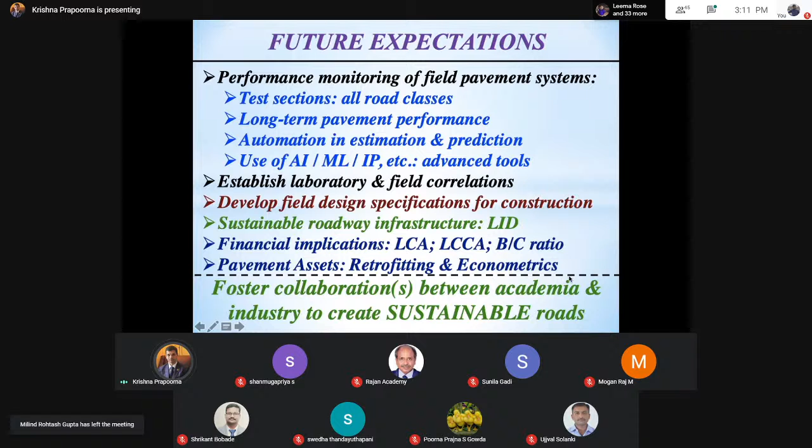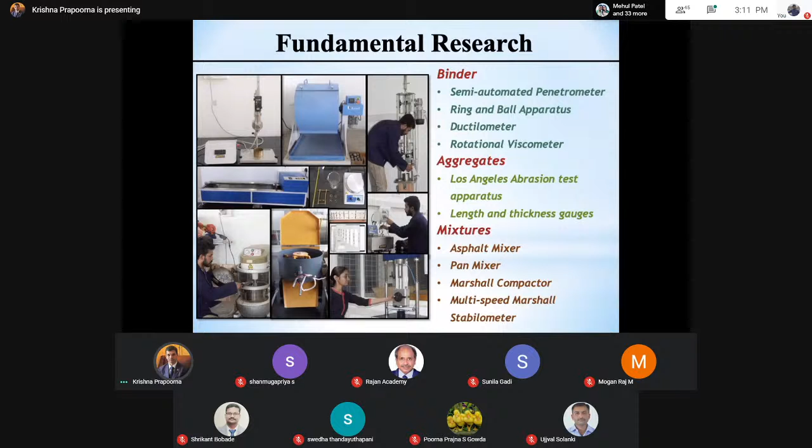A very important catch, please have the industry work with academia. That's the order of the day. Otherwise, I think we'll be in very bad shape very soon. That's a very good model. Again, this is what I showed yesterday to some of you who have not seen this. Please visit our lab, and you should be able to get all kinds of equipment that are there. I just mentioned some things: asphalt rubber, pervious concrete yesterday, pavement asset management, and warm mix I didn't talk about, but hopefully sometime later.

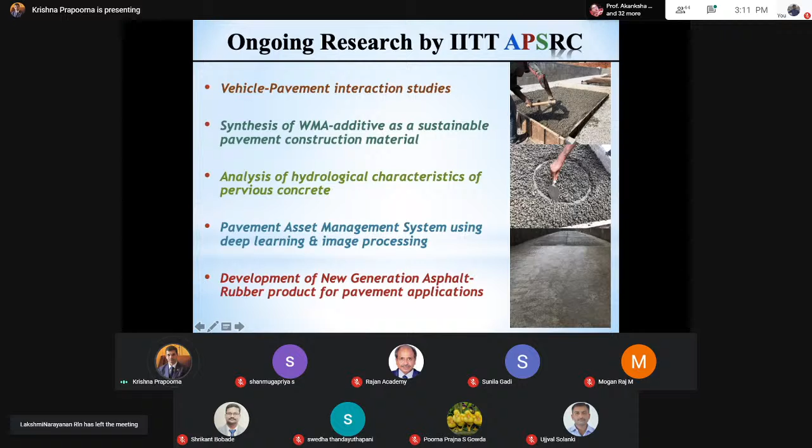We didn't talk about this NHAI project, but we are coming up with new strategies there. I would be remiss if I don't mention these people again: West Bengal Highway Development Corporation, who helped us, and some of my students who now are working in various other institutions as faculty, they were very kind to us. Engineers in chief from West Bengal and Andhra, my past students who are now faculty at IITs, plus IIT Tirupati director who is my collaborator on pavement asset management, and AP RDC, and several other people. So that's the end of my presentation. I'll be glad to take up any questions.

Thank you so much, Dr. Krishna Prapoorna. Excellent speech, thank you very much. I loved it, because I am also working in artificial intelligence right now, so I'm happy. I'll meet you soon. Please, Shanmugapriya, you can send the link to participants, and participants you can post your questions please.

One question: have you measured IRI? No, we haven't measured IRI yet. We haven't done it, but it is there with the data. APRDC has done the roughness calculations. That's not exactly IRI, it has to be converted to IRI. That's the answer to your question.

Any other questions, you can ask me. Good evening, this is Dr. Asha from St. Peter's Institute of Higher Education and Research, Chennai. Your lecture was a very new one, like use of artificial intelligence in civil engineering. I think it's a growing area. Since we are not familiar with artificial intelligence, if we want to do some projects in it, what basic knowledge or skill should we have, or what should we refer to do some projects in artificial intelligence?